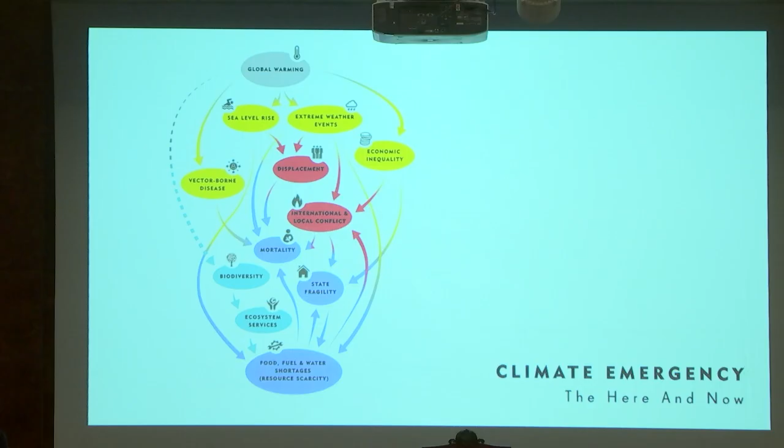And, you know, this isn't a new conversation. In the 1970s, people were having this conversation, and it was about operational carbon. It was about the heating and the cooling, the lighting of our homes, of our offices, of our schools. And you can see that in the 70s, the vast majority of carbon for a building's lifetime of 60 years, normally 60 years, that the vast amount of carbon created by that building was the operational carbon.

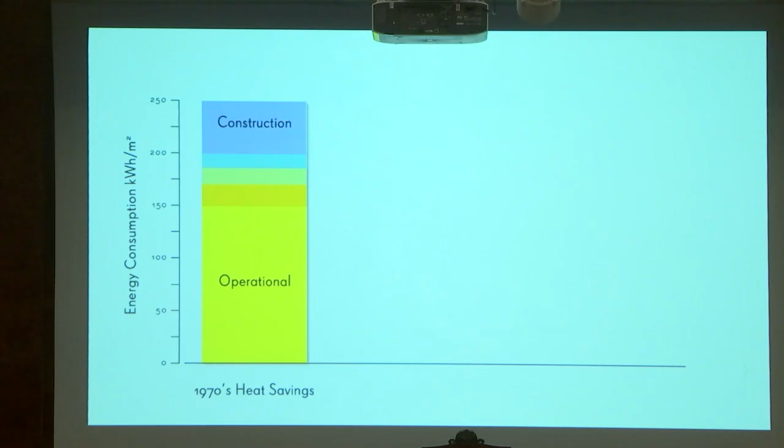And we got pretty good at actually reducing this with double glazing and insulation, and really beginning just to think about these sorts of issues. And by the 2000s, this had actually sunk right down to becoming about a third of a building's carbon footprint.

And so in the 2000s, we began to think about where does our energy come from. You know, and so we put solar panels on the roof, we put a windmill outside, we had geothermal, we had all these ways of creating energy, which really are low-hanging fruit. And all these things have allowed us to continue in the same way without any real major change.

But where we are now, in the 2020s, when we've got good at solar panels and good at windmills, means that actually the vast majority of the carbon of a building's lifetime is the materials and the construction process. And so, as members of this industry, what we need to be looking at is actually this burden.

And this now in Europe is nudging towards 25% of our greenhouse gas emissions are caused by construction and the materials that we use for construction.

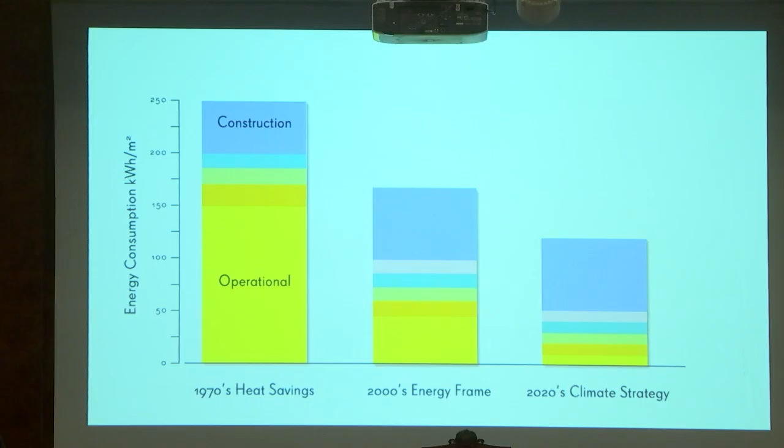And so this is really, at the moment in Europe, completely unregulated. This doesn't have any laws. There's a little law in Denmark that says you should take some notice of it. There's a law in Ireland that says you should tell them the numbers of the embodied carbon. But actually, this is something that's been very slow to emerge. And that's, for lots of reasons.

And you can see because there's a lot of money in construction. This is the Bloomberg building, not by us, by Norman Foster, Sir Lord Foster. And this building won the Stirling Prize in 2018. And it won the prize because of sustainability, because they spent 100 million euros to push themselves above building regulations, beyond what was necessary.

They spent 100 million euros. In fact, somebody at Foster's told me that each one of these fins costs the same as a Maserati sports car and has a higher carbon footprint. In fact, the 100 million pounds that they spent on this building, on these systems, on really complex air movement handling systems, monitoring people, monitoring the air conditions outside and inside.

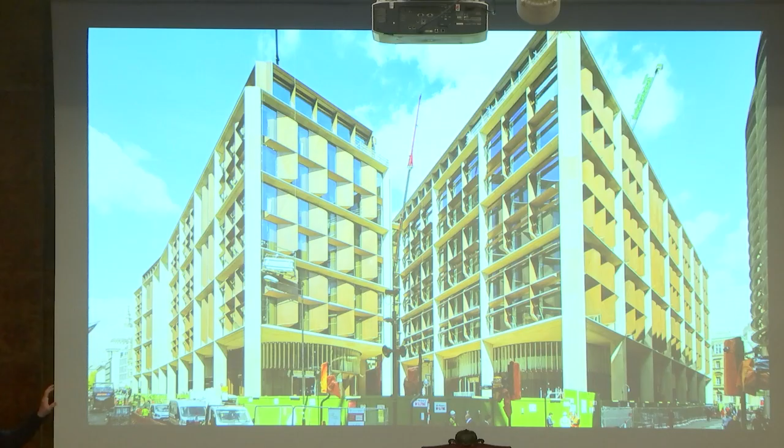Of this 100 million pounds, the service engineer told me that if they put a poster up outside the front door, and in the summertime the poster said 'Take your jacket off,' and in the wintertime the poster said 'Put a sweater on,' he said if they put that poster up outside the building, they could have saved 100 million pounds. And so the reason why I talk about this is actually just to address the problem that we have.

Which is at the moment everything about reducing our impact on the climate is all about an additive process. It's all about putting more stuff on, doing the same thing, but putting more stuff on top of it. And what we need to be doing, we think, is to step back from this, to think more carefully about how we see success in architecture, to think about how we gauge a building's success, how we feel successful as architects, and to think more carefully about that.

Not being an additive process, but being more conscious about the building materials that we use and where we think our buildings have succeeded, where we think that they're successful, and perhaps start thinking more about the people that use those buildings rather than the people that designed them.

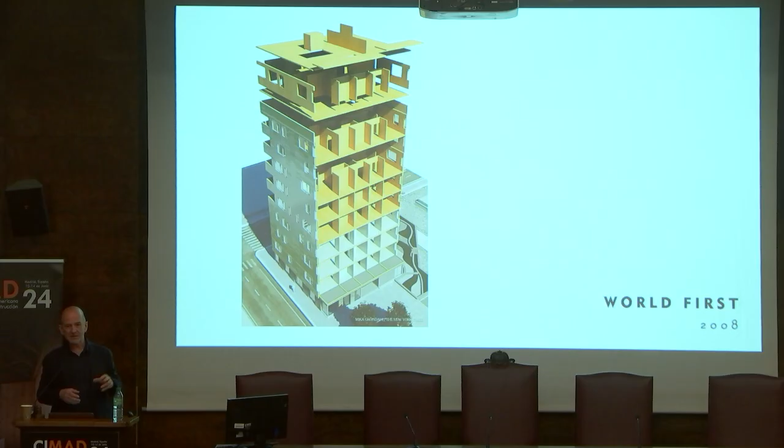And so in 2003, we built our first CLT building. A little building, 40 square meters. We dropped it into the backyard of an existing building in central London, and it was fantastic. It was a beautiful process. It was amazing, millimeter perfect. The whole building was built on a Saturday afternoon, and it was wonderful.

And after that, we built a couple of small buildings from CLT, but we had in the back of our mind, in the conversation in the office, this idea about the complex issue you have with increased urbanization, a need for dense urban housing, and at the same time understanding that the concrete and steel that was going to make this housing would exacerbate the problem of climate change. So how could we find a viable alternative for concrete and steel in high density, high-rise housing?

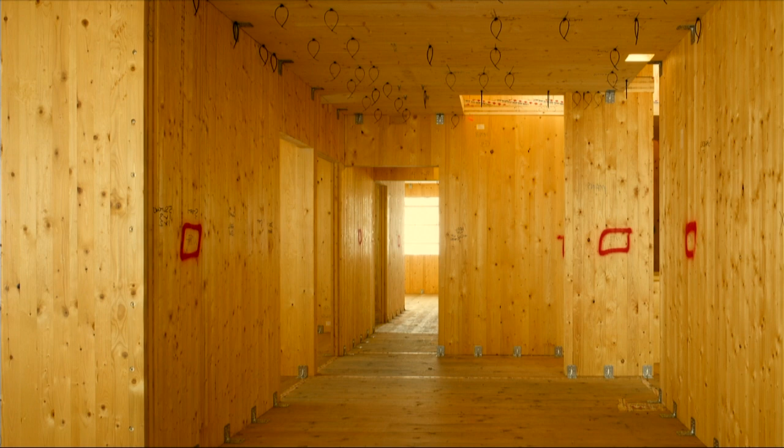And so in 2008, we were fortunate enough to get this project just near our office in London. And the entire building, 9 stories high, is made of timber. So there's timber lift shafts, timber staircase, timber walls, timber floor, timber roof. And you can see really quite simple construction. 4 people built the entire structure in 27 days. The whole building goes together with a 7-centimeter bracket and a 12-centimeter screw. So very fast, no power tools, no cement mixers, no grinders, no axes, no massive noise.

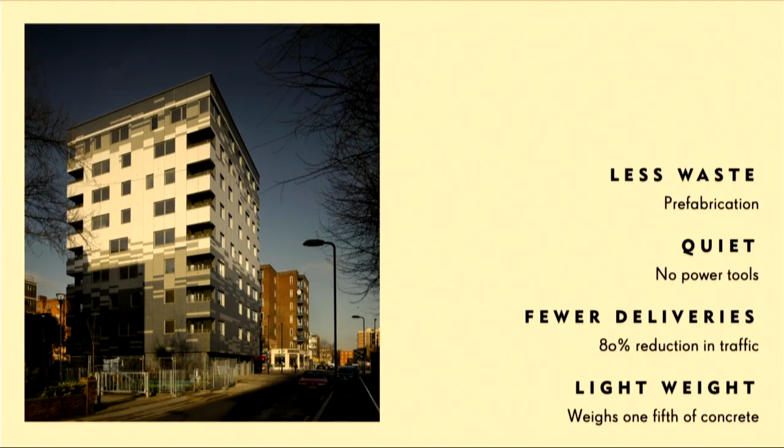Very quiet, very fast, very simple process. Far less waste because it's all prefabricated. So no massive trucks coming through the city all day long, fewer deliveries because of the prefabrication. And lightweight - it weighs 1/5 of a concrete structure. So reduced foundations, and again reduced materials coming into the center of the city.

And so we were so excited about what we'd done, we wrote a book about it. And this has become really quite an important part of our practice, because we had a lot of interest in the building when it was going up, and we thought to ourselves, the reason that we've done this is not through any personal or individual sense of achievement, but because we think that this is the way that everybody should build.

This is something that all architects, all contractors, developers should be involved in. And so we decided at that point that we would share all our work, and that we would talk about our work whenever we had the opportunity, that we would share our drawings, that we would share our technology, and that we would be evangelical about the opportunities of building in timber.

And so this book is still online, it's still available at Amazon. I get 10 cents. So, and then in 2012, we built a couple more buildings by then.

In 2012 I sold my apartment, I sold my car, one of my children, and with 2 friends, Dan and Nicola and Jason and Laurie, we bought this piece of land in Shoreditch. When we bought the piece of land, we got the planning consent, and we had 4 floors of offices and then 3 homes, so 3 story homes.

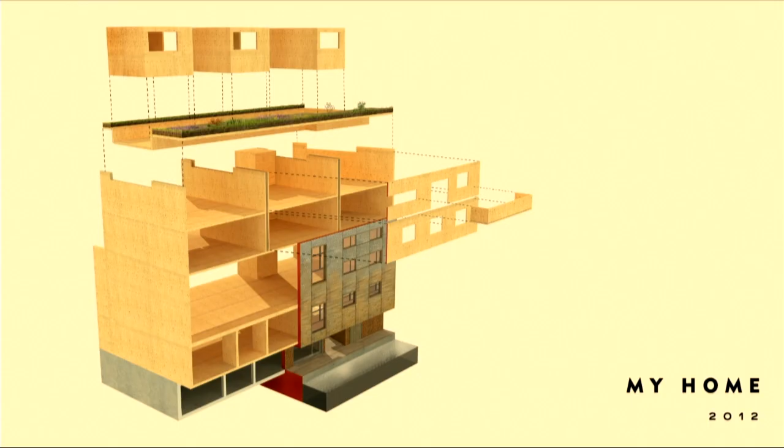And so we see the beginning of this happening as well with this technology. And so you can see this is the building going up. And again, instead of having big panels and cutting holes out of the panels, we're starting to use the material a lot more efficiently.

The whole building, you know, Murray Grove, our first tall building, that was built, you know, that was drawn on tracing paper, and the engineering was done on a calculator.

4 years later, this is all three-dimensional software, and we're taking the same software, it's going from our computer, it's going to the engineer, it's going to the factory. So it's a completely different process, a completely different way of designing, of calculating, of manufacturing and construction.

And that's it, just before I left. It was actually sunny in London when I left. And so we've completed now 30 buildings in the UK and France.

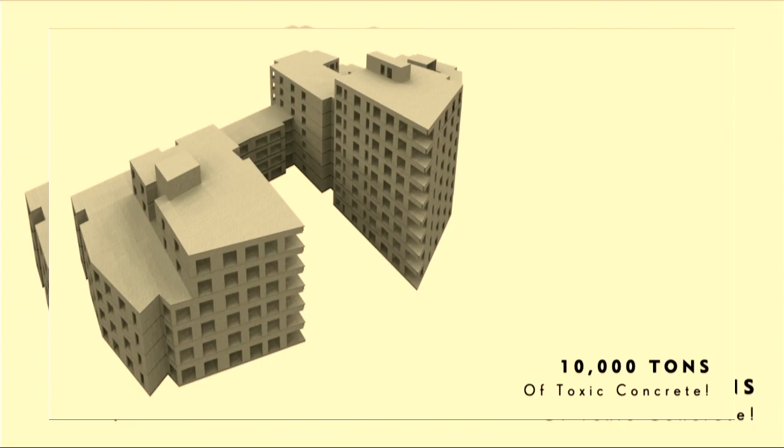This is the biggest completed project. It's 20,000 square meters in North London, a residential tower. It would have weighed 10,000 tons in concrete. 10,000 tons of concrete coming into central London. But in timber, weighs less than 2,000 tons. So it's incredibly lightweight. This is dense housing.

Here what we've done as well is to begin to understand the way that the material works in terms of height and in terms of density. If you remember, when we first got this project, there was a planning consent on the site for 3 towers, about 15 stories high, in a row. Now you can't do that in timber.

It just doesn't work. Tall, thin buildings in timber don't work, because the timber is so light that when you're building in timber, you're not thinking about how you hold it up, you're thinking about how it will blow over. So the shear forces, the horizontal forces against it.

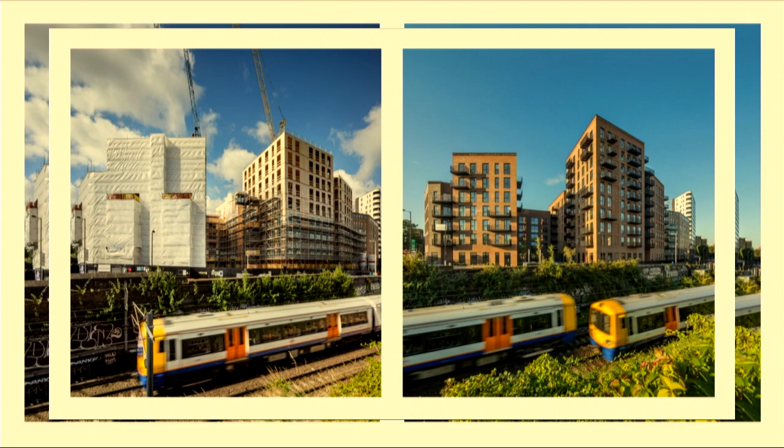And so what we've done here is to make a low, dense building that works with those forces in mind. Now, when you read Dezeen or any of these magazines and see these super tall buildings made of timber, colored in brown, and underneath it says timber building, they all have lots of concrete on the top floors to weigh the building down so that it doesn't move in the wind.

So this building was finished in 2017, incredibly quickly. You can see how fast it was, because by the time the train has gone past, the building is finished.

And we were in contact with other people in the UK who were building buildings from timber. We got to the point where we were kind of like stalkers. If we found out somebody else was building in timber, we'd call them up and say, hey, we hear you're building in timber, how's it going? What are the challenges, what successes, where are you getting your timber from, who's the engineer? We began to try and build this community in the UK of people interested in doing this. After a couple of years, we had a large amount of information, drawings, photographs, interviews, so we approached the US Department of Agriculture, and they paid us to put this together in a book.

This book is still available online for free, at thinkwood.com, and you can download it. This is a study of 100 projects across the UK, some of them by us, but not all 100. This is a project we completed in 2018.

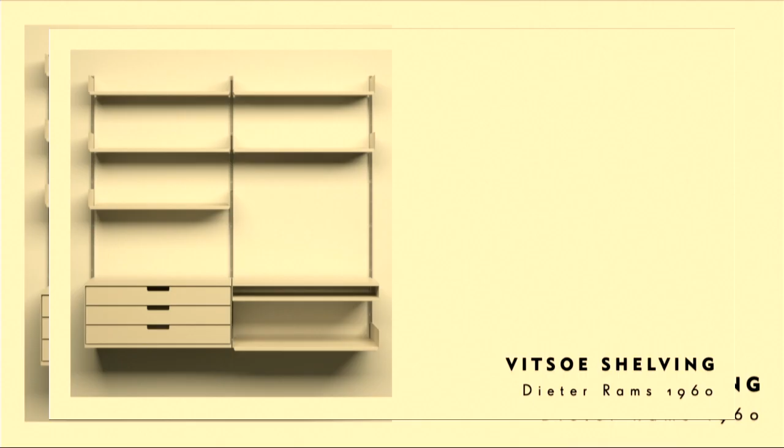It's a factory building in the UK for this shelving manufacturer. This shelving system is loved by architects—it's very simple, has these rails, and within these rails you can place components: shelf, drawers, desk, and you can move these components around. You can take it down, take it to your next house, put it back up, change the use of it. And they said to us, what we want is a building that works in the same way.

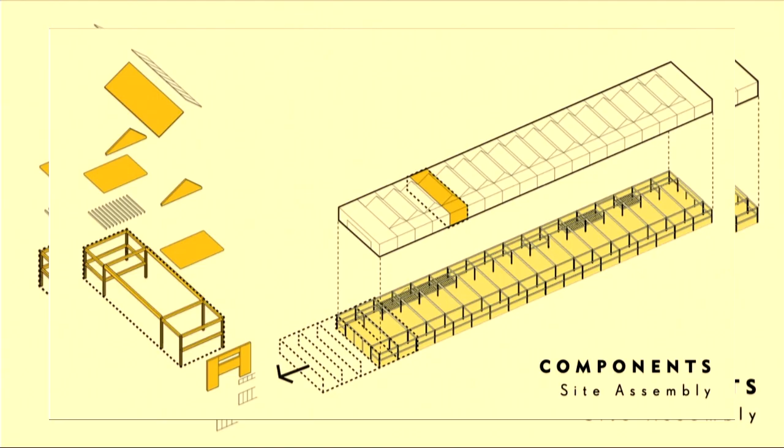So that's a challenge, obviously—architecture is a little bit different from furniture design. So we worked with them, designing this system where we have this very strong frame, and then to brace this frame, to hold it still, we put softwood CLT on the outside of the building. The inside uses a hardwood LVL—that's a veneer laminate, so like glulam, but veneers, building in beams and columns. It's incredibly strong, about 3 times stronger than concrete in compression.

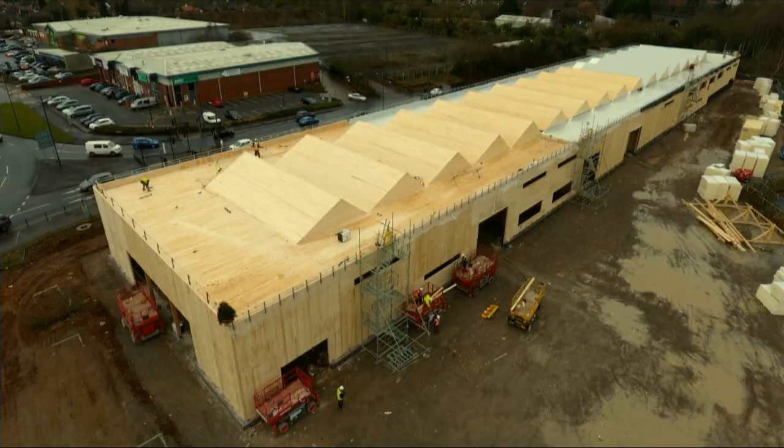So with this lightweight, super strong frame, we then clad it with CLT on top to give it that bracing. You can see here the north lights providing daylight inside the building, and this is the frame, the LVL frame.

And we love LVL because the thing about a veneer is, you get the trunk, you put it on a big spiralizer, spin it really fast, and out comes the veneer. So you're using about 95% of the tree—a really effective use of the material. This is made from beech trees in Germany, the second largest farmed tree in Central Europe. A very efficient use of this material—in fact, most beech is burned. About 3/4 of felled beech trees are burned for biomass.

Using this super strong material, when we left the site, we left the client with some extra beams here and here, and the client built this themselves. If you see these slots, the beams slot into here, and the client was able to build these little apartments, these temporary apartments, for people to live in while they moved the factory.

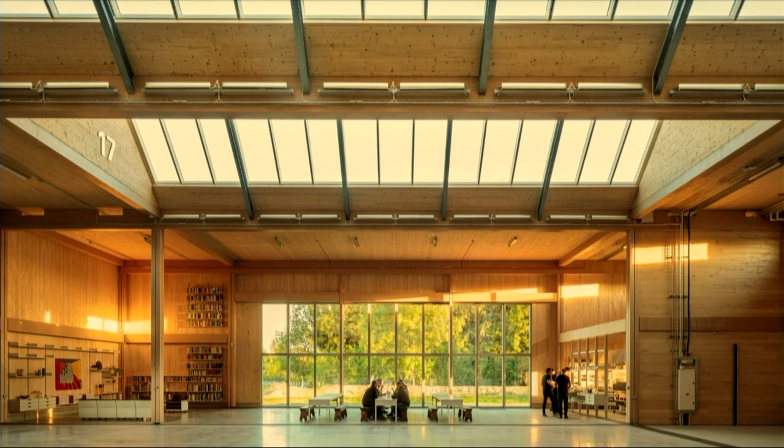And here we also began to enjoy other things about building in timber—the health and well-being benefits of the material. We began to understand that being in a timber building is good for you. People sleep better at night, they learn faster at school, they get better quicker in hospitals, they work longer hours in timber offices. These buildings make a difference to us. And of course, why wouldn't they? Because we know that healthy, natural things are good for us in our clothing, in our food.

Why wouldn't this be the case in building materials? Why would you want to lie in a hospital bed and look at a polystyrene ceiling tile when you could be staring out the window at natural daylight, looking at natural materials? It's so obvious that this is going to be so much better for you. So we took this understanding, perhaps of the biophilic benefits of component-based design, and this is how we've begun, more recently, to develop our architecture.

And so here, this is the Black and White Building. It's a building finished about 18 months ago in central London, for Blackstone. Blackstone, as I'm sure you know, a global investor—they told me when I first met them that they had a budget that was bigger than Belgium.

This building is entirely made of timber from the ground floor up, 5,000 square meters of co-working space. You can see we're using this lightweight LVL frame with the CLT floor slabs and CLT core.

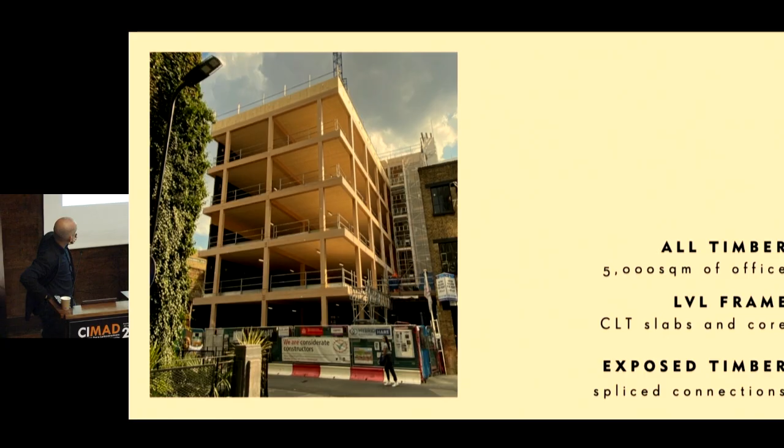One of the things we've done here is, in order to brace this frame, rather than sit the CLT slabs on top of the beams, we sit the CLT within the structure, within the beam. So we use the floor slabs to hold the building stiff, to brace it. By doing that, we're able to reduce the amount of timber used in the building by about 25% from the first drawings to what was built on site.

You can see here how that floor slab sits within the beam. We also worked on understanding what the grid should be, what the span should be, and where the core is placed, in order to provide that stability while using as little timber as possible.

That allows us to say to our clients that this costs the same as a concrete building, but it's 4 months faster to build. That really helped us in our conversations with Blackstone.

The other thing we've done is calculate the carbon implications of all our design decisions. We look at the carbon at stage 2, at stage 3, and before we start building, and then after we've built. So we analyze different design decisions and what the implications of those decisions are.

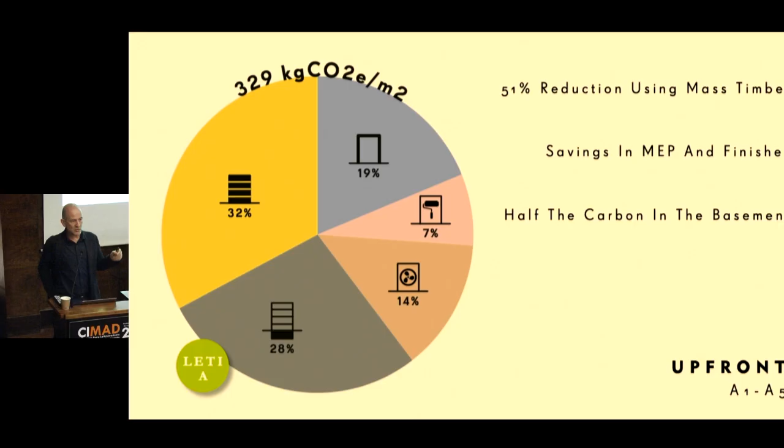If you think that in central London, an office building is usually around 1,000 kilos per square meter of carbon equivalent emissions, we're at about 329 - so about a third of what a typical office building would be.

This building works very much with natural light and natural materials. You can see on the outside of the building we have solar shading, which allows us to have completely clear glass into the building. That gives a very different feel from a regular office building. You can also recycle the glass, which you can't do if you put any coatings on it. So we have this clear glass, which begins to give a different kind of atmosphere to the building.

You can see it has a kind of domestic atmosphere, a much more human feeling when you're in the building. It's really simple, really pared down. The form of the building is very simple - it's sufficient for what it does, and it enjoys that sufficiency, that efficiency of the structure. We really let the wood do the work, as our t-shirt says.

This building was two-thirds pre-let before it finished. It was on budget, on time, and cost equivalent to concrete. And when I see the client now, he gives me a hug, which is very nice.

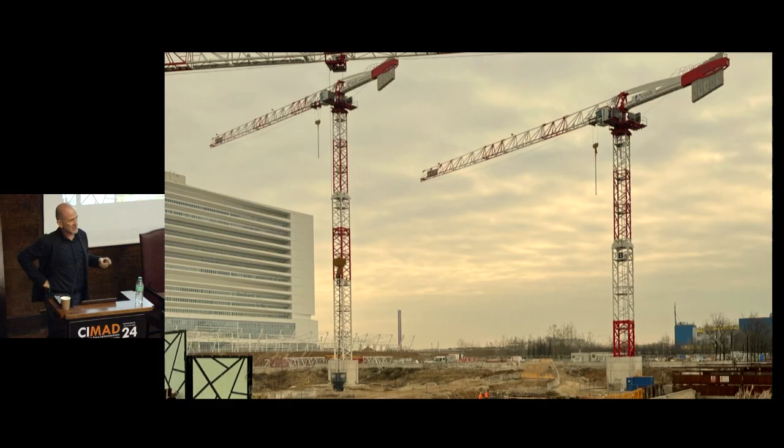Now we're on site with our biggest project so far, which is in Milan - again not central Milan, but on the outskirts. This project was also really about efficiency, for Lendlease.

We worked from the very beginning with the agents and developers for this building, and they were absolutely categorical that we had to have a 9 by 9 meter grid - the perfect office space. So what we did was design that first, creating this incredibly efficient structure for a 9 by 9 meter grid.

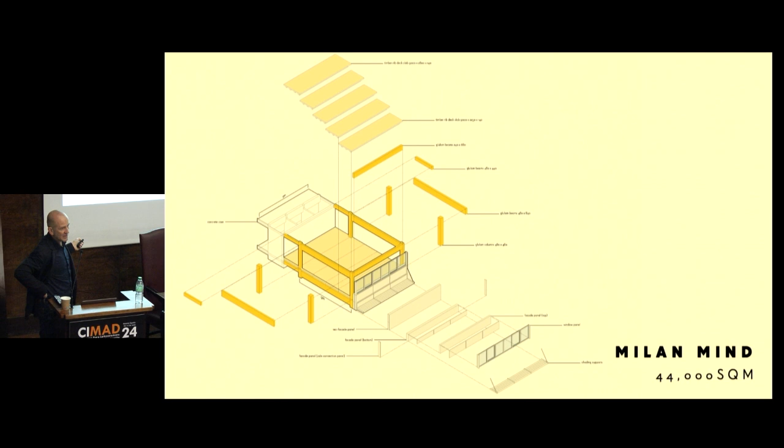Then we have the services running behind, which come into the grid. We take that grid, work it up through the building, have a prefabricated facade, and carry it across the building. The building will be complete in 10 months - that's 44,000 square meters in 10 months.

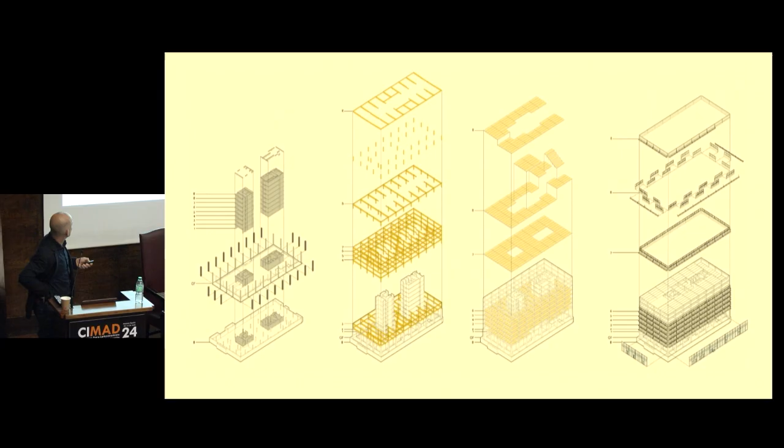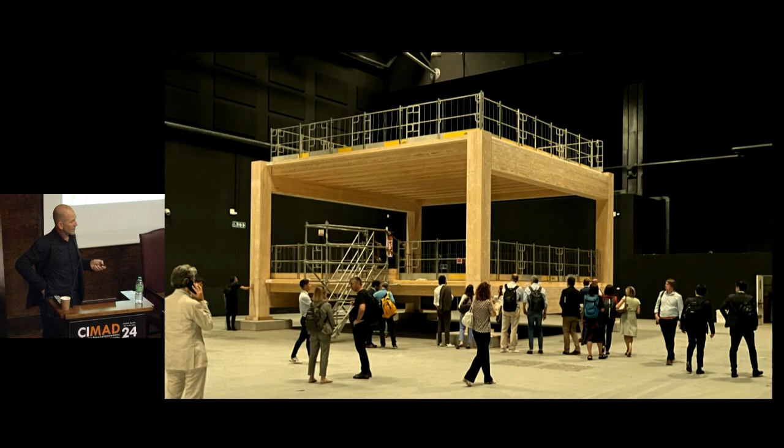We built this in Milan, for the insurers. We got the insurers and the estate agents and brought them to this warehouse in Milan.

You can see this is an insurer here, trying to push it over. Oh, it's quite strong. So, in fact, this is the guy that gave us the insurance, and he actually charged the client less for this building than they would have for a concrete building, because he said that so much care and attention had been taken over the detailing that they weren't used to seeing that much care. So they gave us a lower insurance.

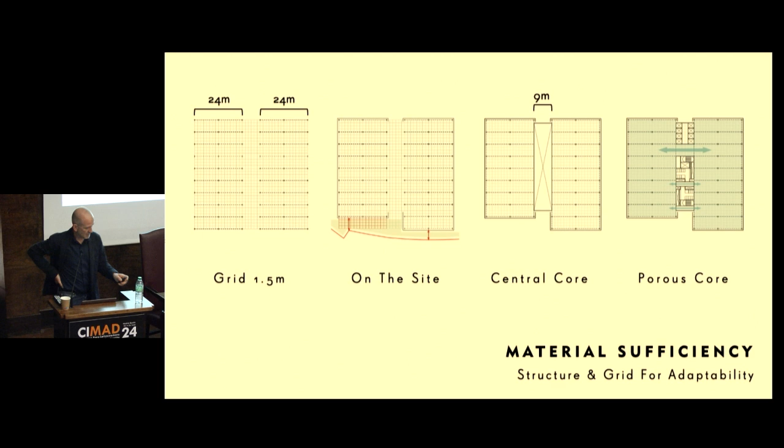This is our latest project in London at the moment, a hybrid project. Again, one really about efficiency, about understanding the job of the office. This building is designed around a grid for steel and timber. What we're doing here is using steel columns, but using gas pipes, so we're using recycled steel content. A gas pipe has to be plus or minus 1 millimeter, and any gas pipes manufactured which don't quite meet that tolerance are rejected. So we're using those as our columns in the building.

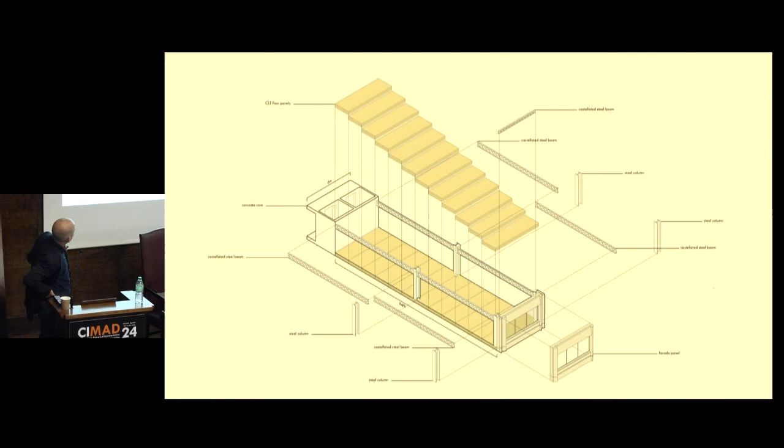We set that out on a 24 meter by 6 meter grid. We put the core in the middle so that it efficiently works and feeds the office, like this. Then we set out that grid using the timber, a prefabricated facade, and stretch that up the building. So then we have 45,000 square meters of office building, a 60% reduction in carbon over a typical central London office building.

No basement, which is absolutely essential for carbon savings, and timber floor slabs. What we were able to work out with our client is that in a typical office building, around 70% of the carbon is just the floor slab. So rather than thinking about the glamorous moves of the first building we saw in terms of reducing carbon, the Bloomberg building, what this building does is look to identify what the key problems are and solve those. So we take out the floor slabs and replace them with timber.

We remove the basement. A basement is usually about 5 times more carbon intensive than a regular floor, because of the amount of concrete that goes into a basement. So we have this incredibly efficient building.

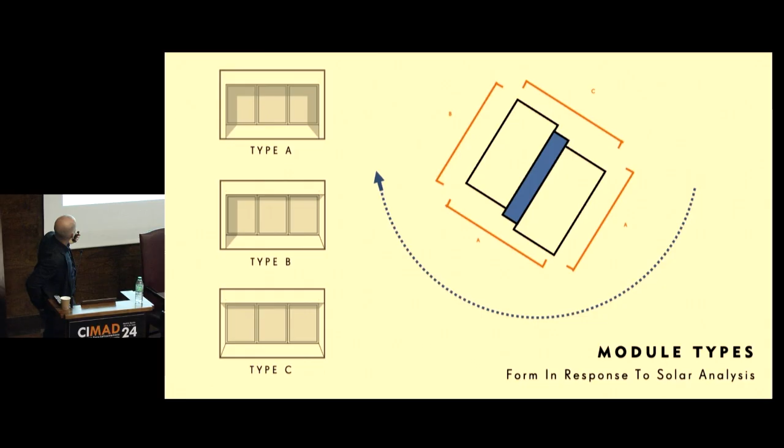We're working on the facade here, so the facade adapts as you go around the building, and we're using— I'll probably hit something. Sorry.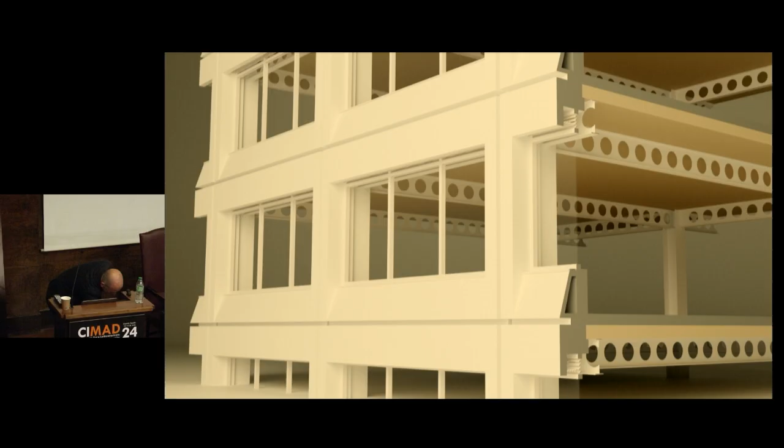So we're using this facade material called UHPC, ultra-high performance concrete, which means our facade is about 35 millimeters thick, an incredibly small amount. Thank you so much. So we're using really lightweight concrete to ensure that the amount of carbon is reduced, but also the weight onto the building is reduced.

So this cladding material allows us to have natural ventilation at the top, and the facade slips onto the structure at each level.

What else can I tell you about the building? Yeah, there you go.

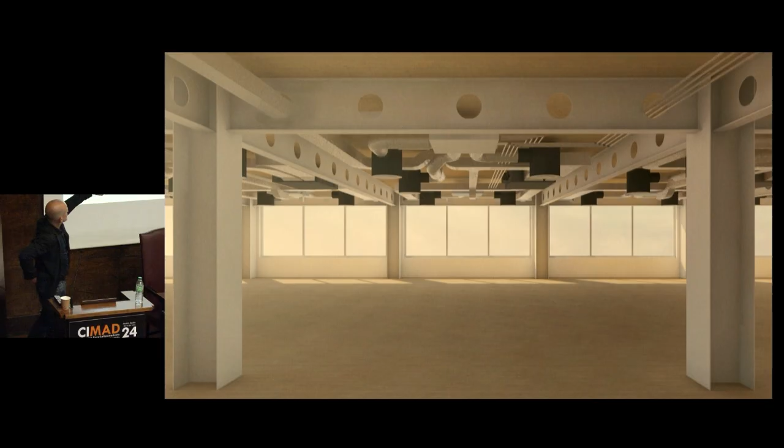Perfect. So you can see inside that the module of the facade is the same as the internal structure, and so this hangs on the building from the outside. You can see each one of those modules there. For fuck's sake.

Each one hanging on. In fact, I've never spoken about this building before. We just finished it—we just finished the design. So this is appropriate. Do you want to stay with me?

So what this building does really is begin to talk about that kind of efficiency and sufficiency, and gaining joy, gaining an architectural success, from an understanding of how that building feels to be in. We have natural ventilation drawn through the facade in every bay, so all the systems sit within the first bay of the building.

And so this is a really pared back facade, this pared back building. You can see here the entrance and the core rising up here.

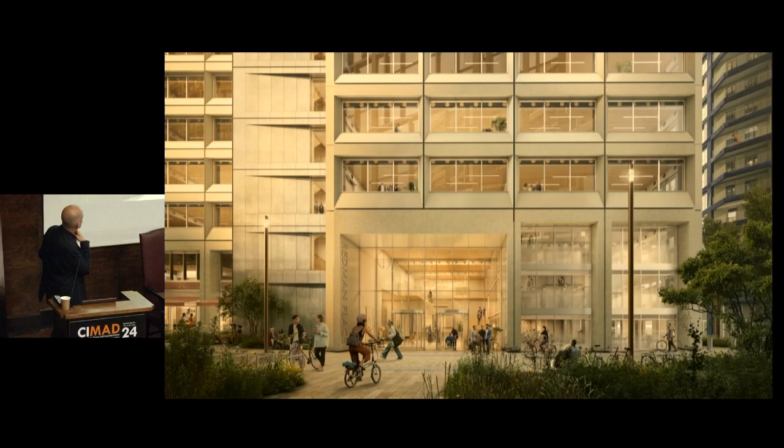Now, one of the things we think about quite a lot in the practice is the buildings that are already there, because obviously the building with the lowest carbon is the building that already exists. This is Manhattan. The average age of a tall building in Manhattan now is about 60 years old, so those buildings are reaching the end of their life in terms of how they're working, the materials and the exterior. What we can do with those buildings, I think in timber, is a really interesting proposition.

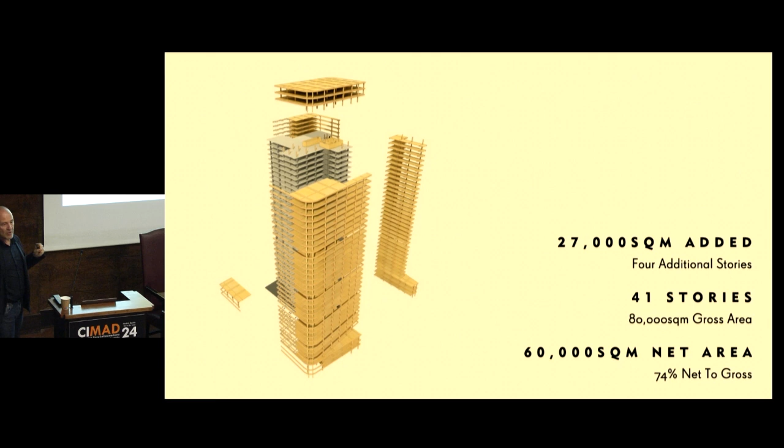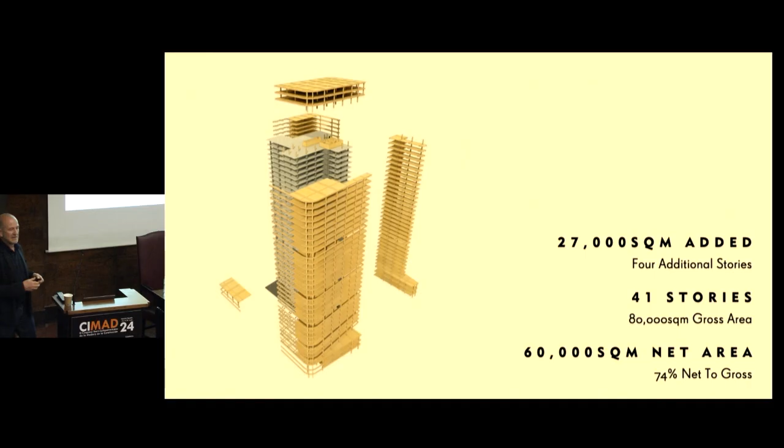We've worked on a project of similar height in London, a 38-story office building from 1968 in central London, looking at how we can add a timber structure to the outside of that building and on top of it without changing the foundations. Because the loading on buildings now is a lot less than it was 50 years ago—back then you had filing cabinets, paper, big heavy desks and lots of people—buildings today require a lot less in terms of loading. So we can increase the area by a third without having to touch the foundations or change the lifts.

So that's that building finished, and you can see that every 6 stories we have this kind of open deck area within the building to bring in fresh air.

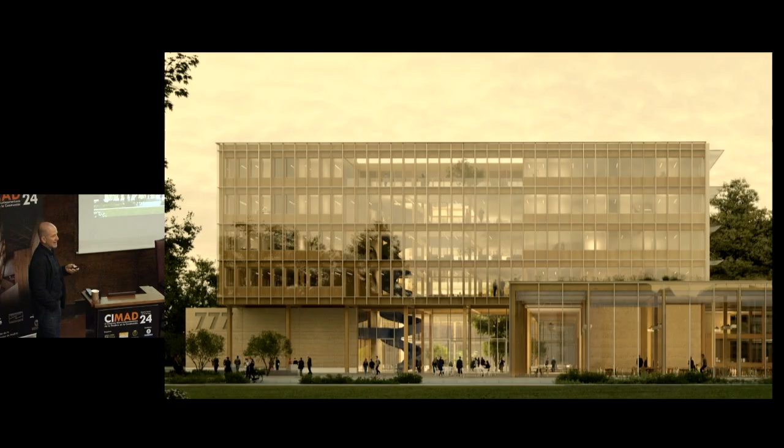This is a building in France, a laboratory building, and here we're beginning to use other bio-based technologies as well. On the ground floor we have rammed earth walls—this is the second time we've used rammed earth, and it comes from the local area. This is about celebrating the heavyweight nature of the material against the transparency of the glass. This is the north facade, and you can see straight through the building into the rest of it—it's about an architecture which is really open. You can see here we have a public courtyard, then a courtyard for people who work in the building, and that flow through the building is about a very open, very accessible architecture.

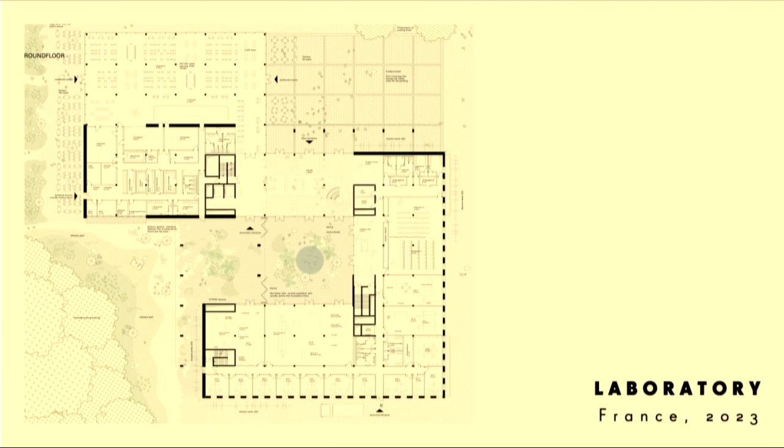Through there you can see, with the rammed earth walls on either side. Yeah, it's very exciting—this is a project we did a while ago.

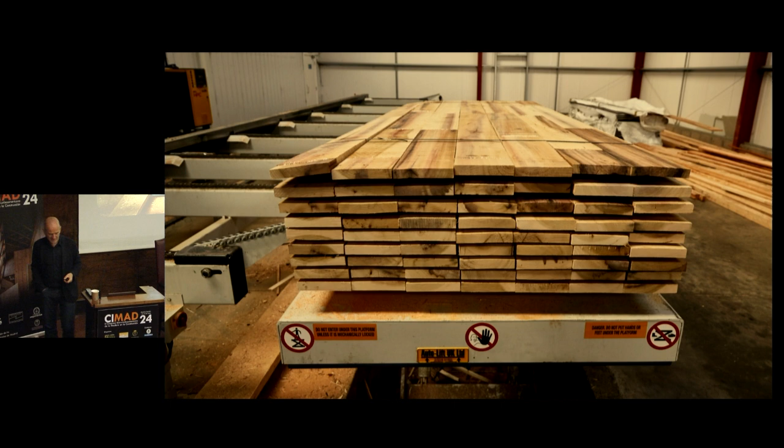This is our only built project in Spain, so I thought I'd talk to you about it. The Americans have a problem—several problems—but this is one: they have a tree called the tulip tree, which has a very small root ball. Sadly, because of climate change and increased wind speeds, they've nearly all blown over in America. So they have big warehouses full of this high quality hardwood called tulip wood. They sent us some in a pallet, in a shipping container, gave us a little bit of money, and asked what we could do with it.

So we began thinking about how we could talk about the work we were doing and use the material to try and access a wider public, to talk to people about the opportunities of building in timber, of modular construction, of prefabrication.

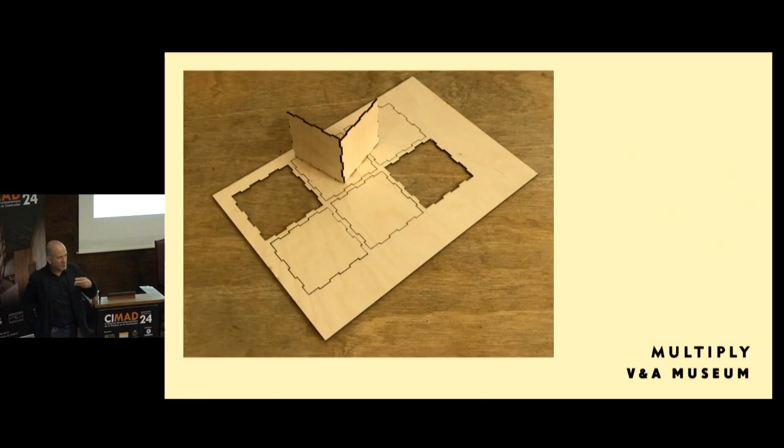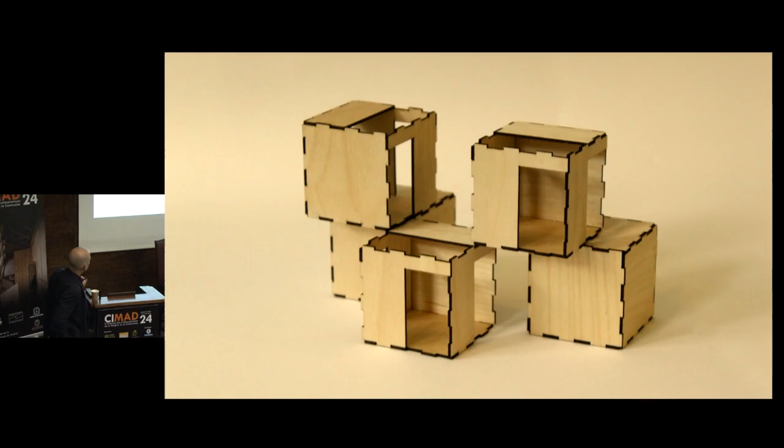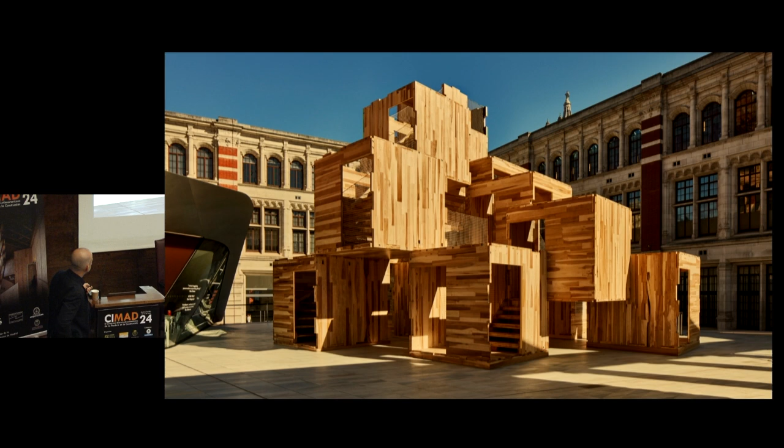And then we took that and built these boxes and piled them up at the Victoria and Albert Museum in central London. People took their children there and then ran away, left their children.

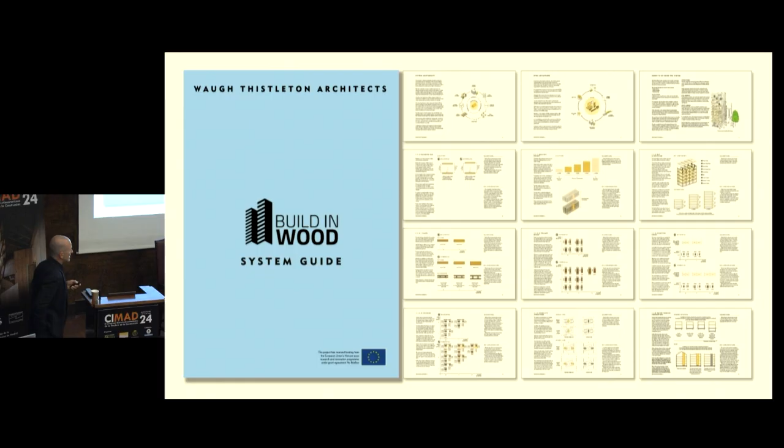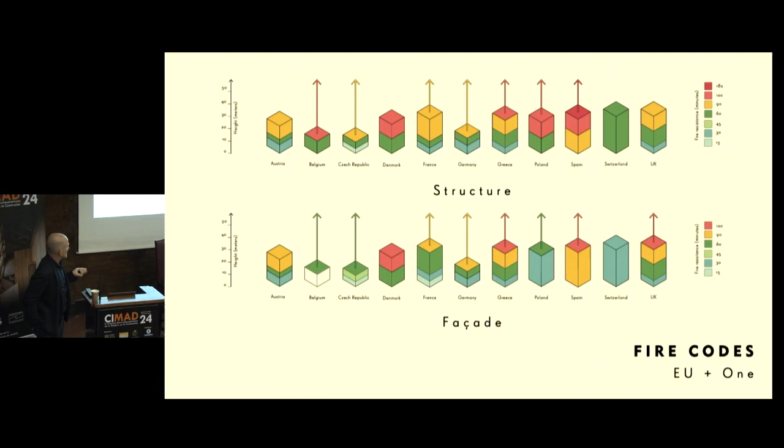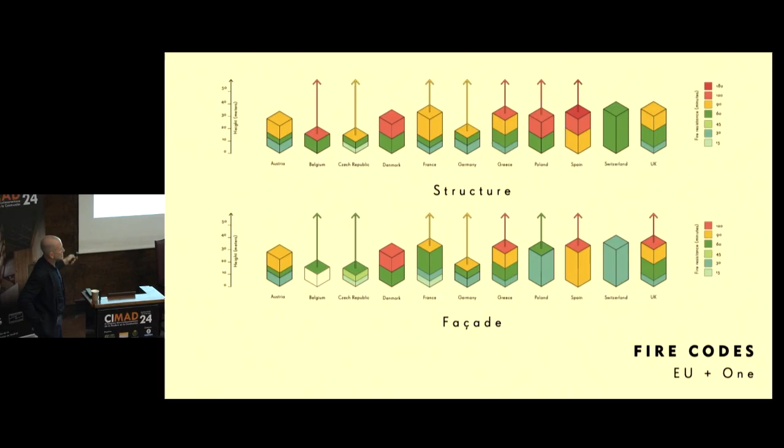About 20% of our turnover as a practice is pure research, and we work with a number of different organisations on research. We have two Horizon projects at the moment with the European government. One is a Build in Wood system—the idea is to take all the different regulations across the EU, plus the UK, and look at how we can build a system within those regulations, unifying the process of design, manufacture, and construction through regulation across Europe. This system design works within all the different building regulations and is a parametric design that will be available open source later this year, online at buildwood.com.

And so we have 7 pilot projects working with this system across Europe. Some of them are new buildings, some of them are on top of existing buildings. And then they will be available, as I say, in 3 different system guides towards October this year.

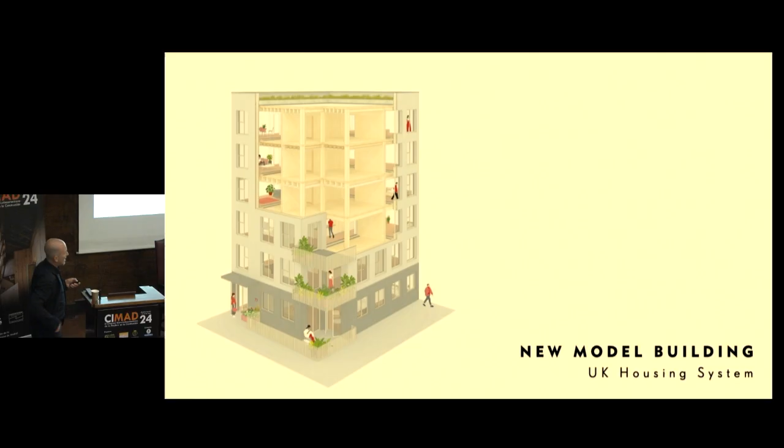And in the UK, we're working on a system for providing safe and robust housing. After Grenfell in the UK, there was a serious amount of worry about building in timber because of fire. So we worked with the insurers, policy people, local government, building code officials, fire engineers, structural engineers, for 3 years on this project. And so what we did was propose 25 standard details, which any architect, any builder, any contractor, or house builder can use.

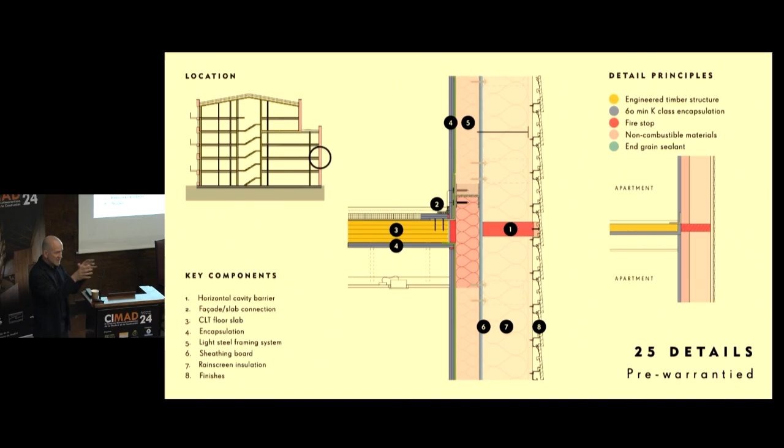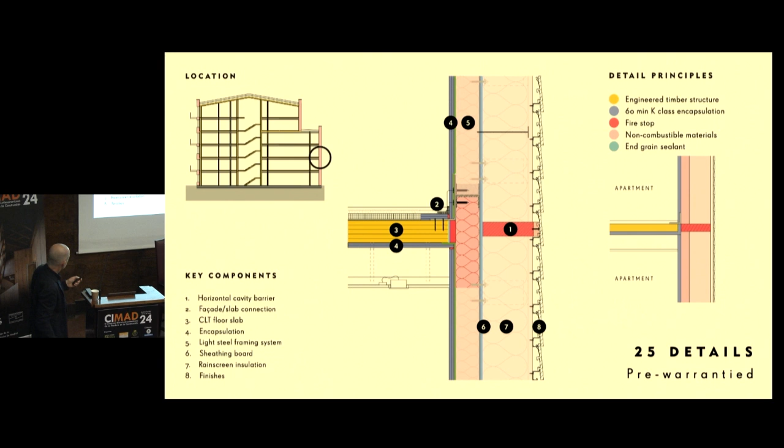And these 25 details provide a robust method of building in timber. So if you build like this, it doesn't determine the plan, and it doesn't determine the facade. So you can use these buildings in lots of different forms with lots of different plans. But every time there's a junction on this generic building, that junction is described and pre-approved. So if you build it like this, you know you will get approval from the city, from the fire brigade, etc. So this is some of those details here.

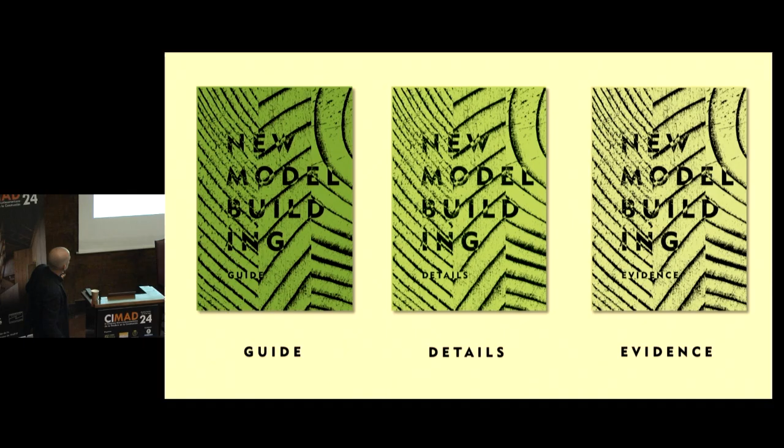And then each one of the details has a checklist. And each one of those is published in a guide, with the details and the evidence that backs up each one of those details.